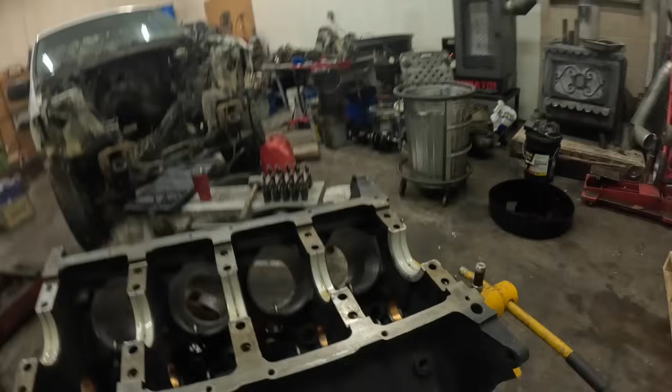Hey guys, this is a project that's been sitting at my shop; this guy's been waiting for a long time for me to get this done. Anyway, finally got it back from the machine shop. Machine shop's had it for probably a good 2 to 3 months, I'm thinking somewhere in that range. Anyway, this is a 7.3 Powerstroke. One of the YouTube viewers brought this thing down from the Portland area quite a while back, and we're getting it back together.

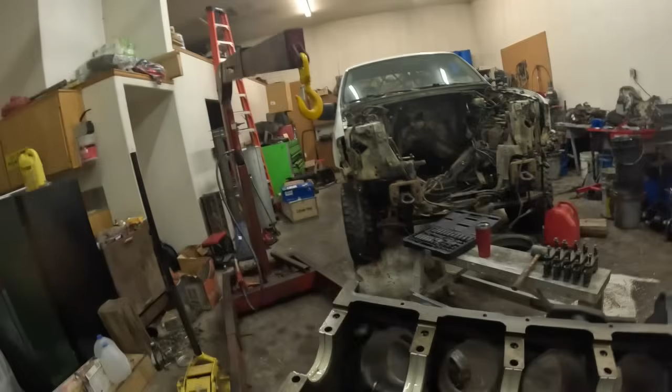But anyways, what was going on here, he bought this pickup from a logger or something, and they basically dusted the engine. It had a lot of blow-by on it, and you could tell when you started cranking on this thing how freely it spun over. Usually when they spin really fast, they either got really good batteries in them or they got low compression. And this one had low compression. You could pull the fill cap off of it and it was just a steam cloud coming out the fill cap. But anyways, no rod and main bearing failures, no cam failures, so it's all going back to standard bearings.

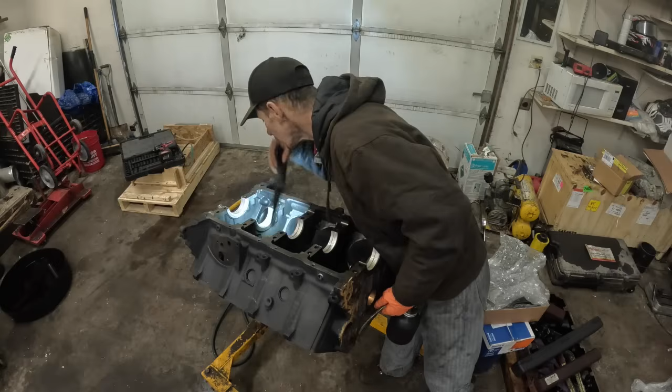That's why I'm not Plastigauging anything, because it didn't have any problems with any of that stuff. The machine shop put the cam bearings in it. So as I'm talking right now, I'm physically checking to make sure they lined all the oil holes up on the cam bearings. And so I'm not going to Plastigauge any of the mains because there's really no need to do that. All the bearings are standard. I didn't have a crank reground. I didn't have anything done to the cam. So they should be fine.

You just got to verify your bearing numbers. I even took an outside mic and measured the thicknesses on my old bearings in comparison to the new ones, and they're almost exactly the same. So that kind of will eliminate that. You can measure your bearing journals too, so that'll tell you a little bit too. So anyways, I'll continue on here with the regular video.

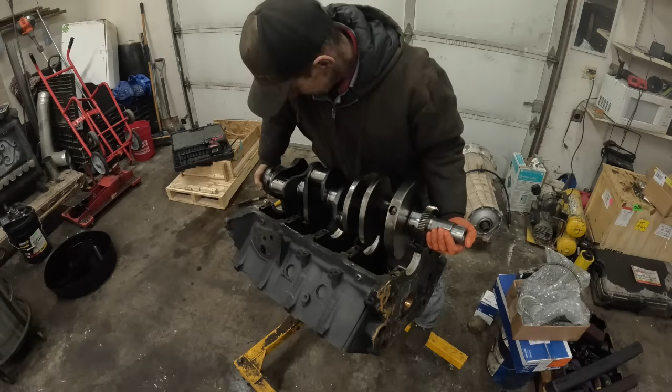Okay. Go. Okay, now we'll get our bearing caps over here on the bench. Get them all set up.

I broke my Leatherman I had for years. I was twisting on something the other day, and the damn jaws right there where it pivots just snapped right off. Really kind of surprised that happened. Them Leathermans are usually pretty damn tough and almost indestructible, but my wife says I could screw anything up. Oh my gosh, getting some of this stuff unpacked is just irritating sometimes.

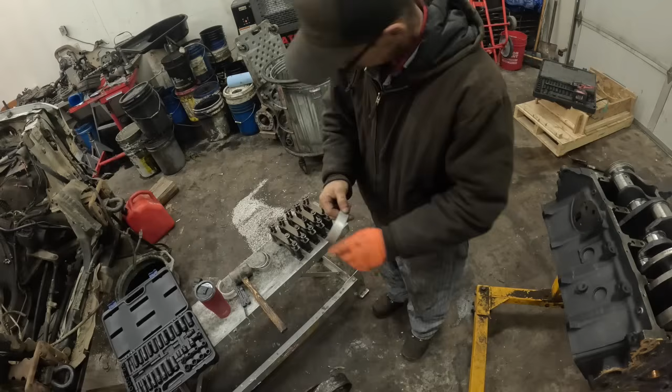Let me get my glasses, because I like to read the back of the bearing if they're marked. Make sure they say standard on them so we don't get in trouble. Now, if you're a novice at this, when you're doing your bearings, just common sense. The ones where your main oil rifle comes in are going to have a hole in them, and those are going to be your upper bearings. Your lowers in the bearing cap aren't going to have oil feed holes in them.

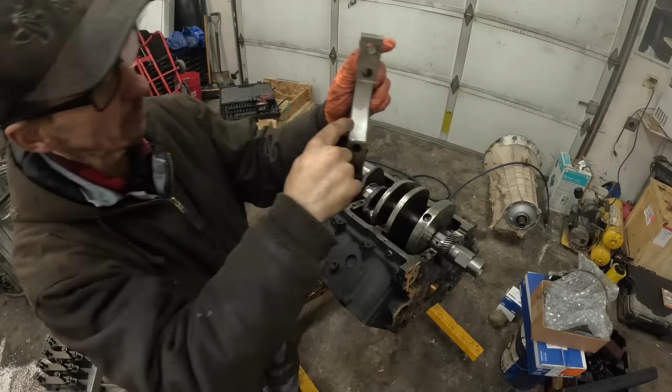Okay, this is going to be the end one here. I thought they were numbered. Oh, that says number 1 on it. Okay, that's number 1, and the arrow is pointing that way. That's the front of the engine block. And another way you can tell is your bearing tangs will be on the same side of the engine.

It does not hurt to prelube the threads on your bolts. What I like to do is put a little bit of oil right here on the cap. That way when that shoulder grabs it, it doesn't bind up, most of the time anyway. I even put a little bit of oil on the shoulders themselves. Just go nice and easy.

But these 7.3s, you can sit there and tweak it. You can't hardly bend them. It's a way heavier duty engine. To me, this is a way better engine than that 6.7. Yeah, them 6.7s got a lot of power and all that. I just look at the way this engine or a 24 valve Cummins is assembled, and I think these are way better engines than the new ones. I pretty much don't like most of the new stuff that's out. I think it kind of fits right in with the rest of America. I don't really like it.

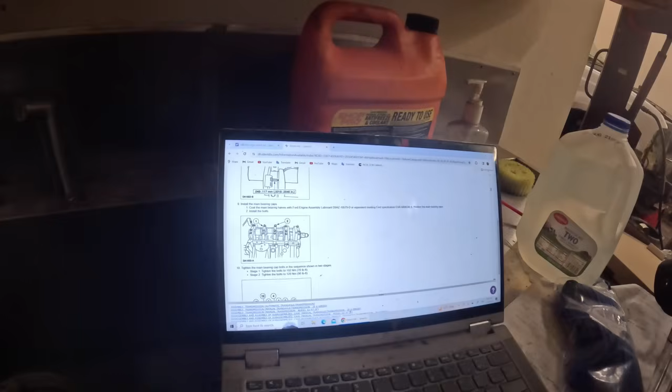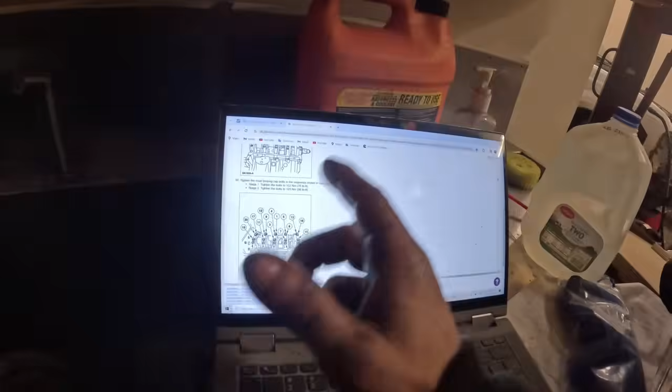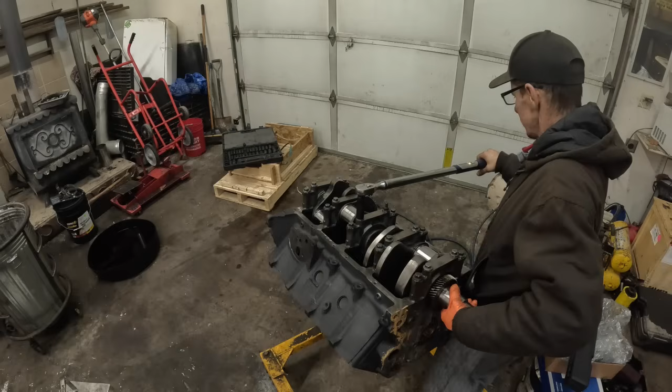Do not turn the crankshaft while performing the main bearing. I'm not doing that. Alright, starting one, 76 foot-pounds. 96 foot-pounds, okay. So they're starting on the outside bolts. 1, 2 on the outside, 3, 4. I know what they're doing. They're 76 for the first stage, 96 for the second stage. A wise thing to do is make sure after you torque it that it still turns freely and doesn't bind up.

My wife got me this torque wrench for Christmas. It's a Harbor Freight, a Quinn one, but I read the reviews on them. I told her I wanted one because I didn't hear anything bad about them. And I'm going to be completely honest with you. I bought that Snap-on one, and it's been nothing but a problem. The batteries, you're always having to stretch the spring out in it to make it work. Nothing but problems ever since I've had that thing. I think this is actually a higher quality tool, to be honest.

There's Snap-on stuff that's good, but some of their stuff is really overpriced shit, you know. It's just like buying a John Deere. They're living off their name. I know I'm ranting and raving, but it is what it is.

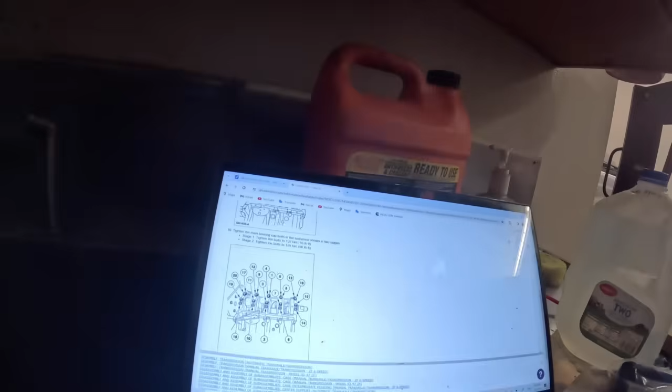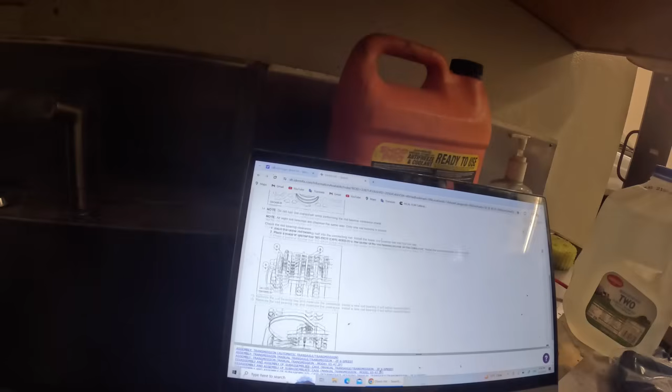Okay, so we've torqued our main bearings down. We're not gonna mess around worrying about that. Okay, the intermediate compression rings. Now they're talking about rings already. Usually you put your cam in, but apparently we're not doing that. Okay, let's see here.

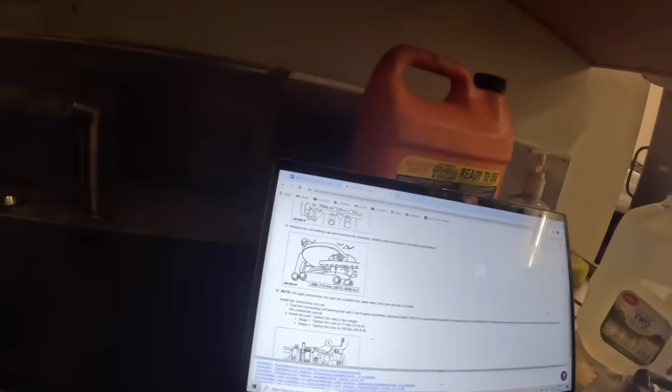Well, let's see here. Okay, so it looks to me like they want you to put your pistons and rods in. All 8 piston and connecting rods are installed into the cylinder block the same way. Only one piston and connecting rod is shown. Okay, square, intermediate compression ring, keystone ring, and of course your oil control ring.

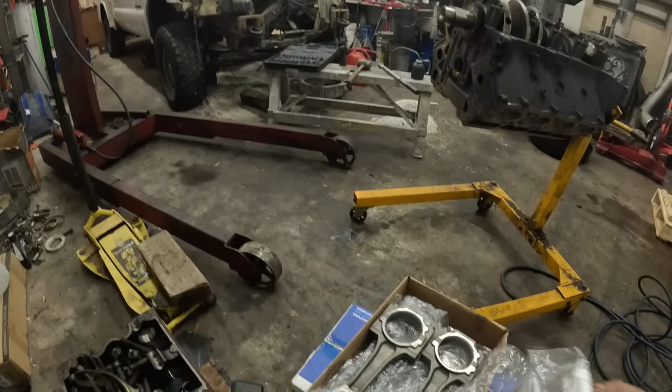So I had all the rods redone. They did all the small ends on the rods. Here they are right here. I guess I must have left a glow plug or something in the cylinder head. There's the dowels that came out of the head, or the block, or whatever. So here's all our rods. They've all been redone. So I'm gonna start setting these all up.

Well, folks, this is a continuation of the 7.3, but circumstances have changed quite substantially since the last time I was working on it. I have a broken foot. And here's what happened, guys. We'll elaborate on that a little further.

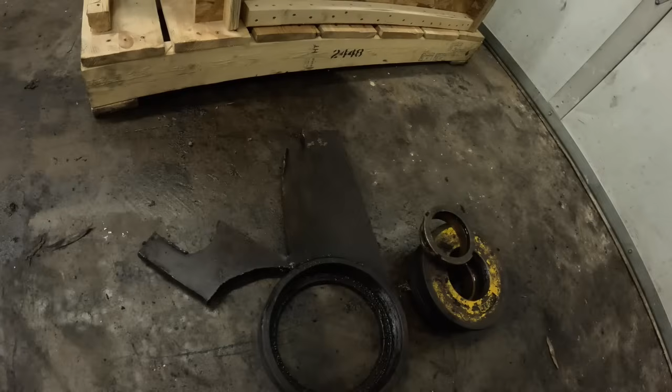So I had a pretty good sized cylinder out there. You can see the size of the nut. It's just a round gland nut. I had a big chain wrench, and I actually broke that chain wrench trying to get this off. I had it heated. I could not get it. It was just rusted solid to the threads. And then I had trouble with the barrel turning on me while I was trying to do it.

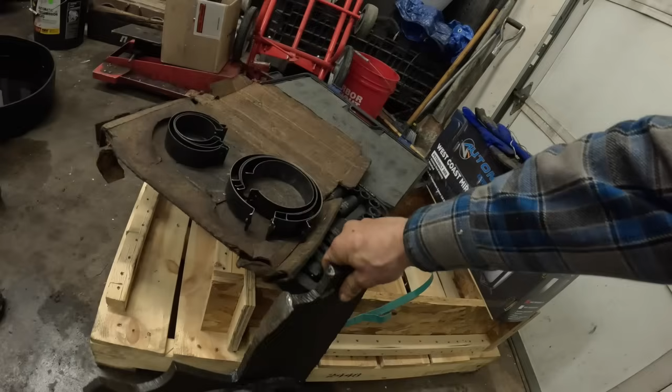Anyway, I finally wound up putting the stabilizer cylinder of my crane, which jacks my truck up off the ground, on top of the barrel and put the whole weight of the truck on the barrel trying to get the stupid thing loose. And I welded this. You can see where I hit it with a 12-pound sledgehammer. So here's what happened. You can see the plate that I welded on there, which I'll gouge back off with my gouging rod and clean up, and you'll never know what happened.

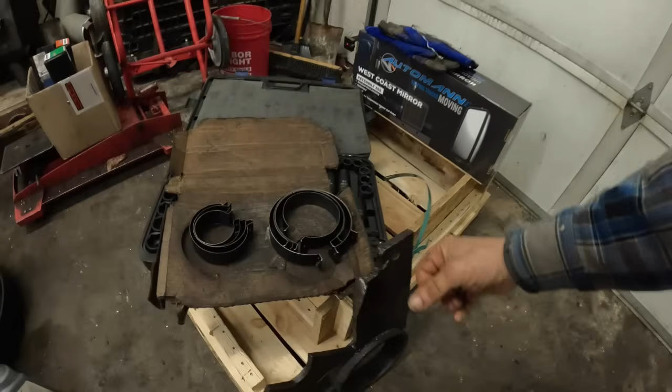I had wrapped a strap around that big cylinder and pulled it over. I was trying to reposition it because I had actually got the thing loose and spun around, and I was trying to get it under the leg of that cylinder on my truck, to put down pressure on it again and whack it again with the hammer. I pulled it towards me like this, and this plate rocked over, and the entire weight of that cylinder and the plate landed on top of

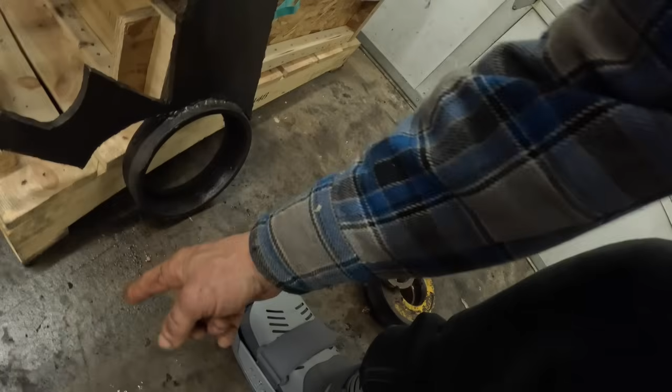my foot right here. We went and got the x-ray this morning, and it split the bone right where the joint is, where the next toe towards your big toe meets. It cracked that bone right in line, which there ain't a whole lot they can do for, but they gave me this boot and said to try to take it easy, which probably isn't going to happen. So anyway, Lulu, are you already trying to get out the dog door?

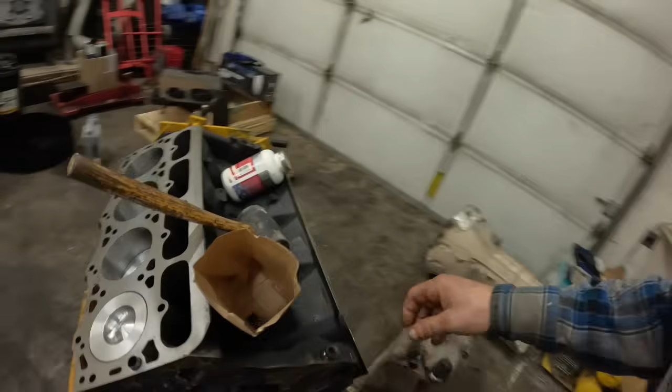So here's where we're at on this thing. We'll continue on. I'm trying to find my light here. Got a couple puppies here. Need to get this transmission loaded up and get it back for a core. I've been sitting on my butt for 3 days, and my foot feels a lot better. But anyway, enough crying about that.

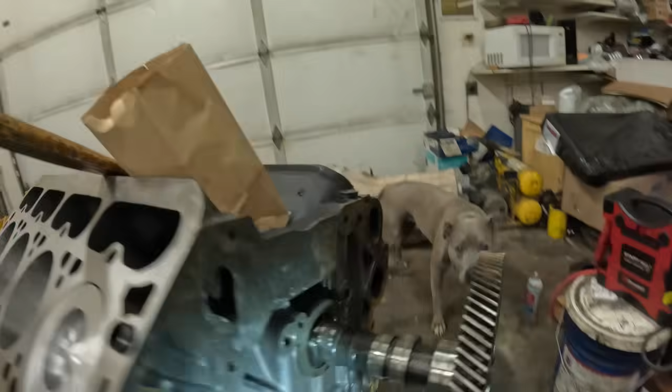Let's continue on. So I got my timing mark for my crankshaft pointing straight up. I was putting this cam in, guys, and then I noticed the typical machine shop situation: they pulled all the gallery plugs out and didn't even send them back. Most of the time they'll send them back to you in a Ziploc bag, and you're supposed to figure out where all that shit goes. So I went to the hardware store and grabbed a couple pipe plugs.

Lulu, what are you doing, girly? My little wiener dog's in here with me. So we're gonna work from the shop at home today.

Man, this stuff's been sitting a while in their store because it's all separated, and I might have to get a screwdriver and mix it up. All the PTFE is separated from the paste, and that's not good. Dripping it right on the brush they gave me. That's making a mess.

Get these pipe plugs in the main gallery bores here. I'll have to go find an Allen wrench to tighten these up. Let me go over here and find an Allen wrench that fits that. Which I don't even know if I got an Allen set in this.

I keep buying more and more tools, and you know, like here's more tools. Here's that special tool for that trailer I did that will probably sit there and collect dust now, but it is what it is. I got the job done. Hopefully it's done correctly. I do have Allens, never mind, I forgot. I did buy a bunch of Allens that one day.

Let's see, what do we got here? It should be an SAE situation here. Okay, let's go over here. Trying to remember what I did with all the ratchets. It's a 1/2-inch drive, kind of overkill for what we're trying to do here, but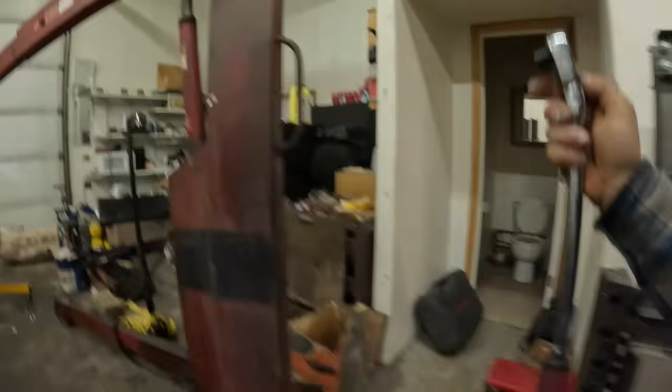I better take my little wiener dog in. She's already cold. She's just a little bitty thing, so it doesn't take much for her to get cold. There goes the light.

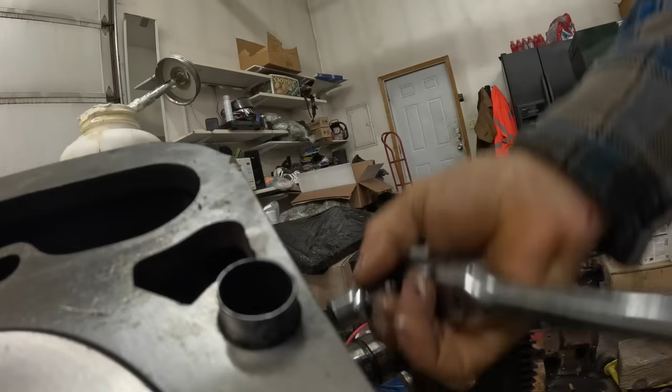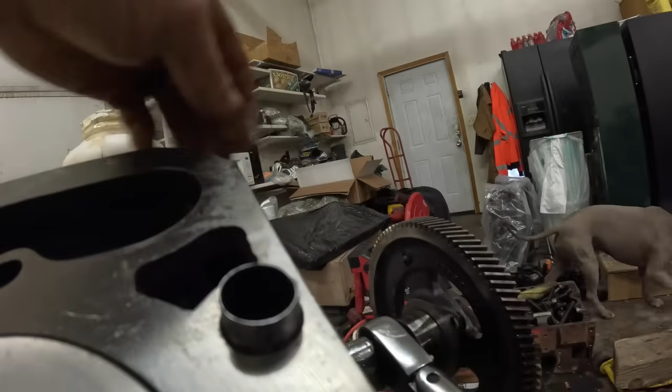I need these to go flush if I can, because the thrust plate's going to hit them if I don't. Man, I hope we don't run into problems here. It's not really wanting to go flush. I'm not really liking that very much. Well, let's check this out real quick. That's why I kind of wanted the plugs that came out of it, you know. Why is that not going on in?

Okay. There we go. Now, is that going to interfere with anything? If I go like that, let's see here. The thrust plate goes over here like that. Okay, those Allen plugs should not interfere with anything as far as I can tell. No, we should be all right. Okay, let's pull it back out.

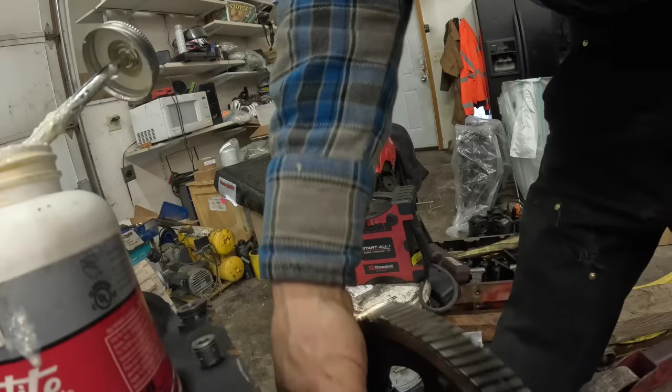Now that we know that those Allen plugs are not going to interfere with the thrust plate of the cam, which those shitheads would have thrown the ones that come out of it in a bag or something and sent them back with it. But I guess all I can really say is that I'm not surprised. I'm kind of used to that being the situation.

One of these 7.3s I had at the machine shop one time was kind of the same situation. They had went through the whole thing and same thing, they didn't put them back and I wasn't paying attention and it was my fault too. Now I know. I thoroughly check all these galleries now that I know that they're gonna pull all this stuff out and not put them back. So

anyway, on that particular engine, these are a HEUI'd engine. If you don't know what HEUI stands for, that's a hydraulic electronic unit injector. Basically, the injectors are controlled from engine oil pressure off your high pressure oil pump. There's an amplifier piston on the actual injector that amplifies the pressure. So you're going to have oil pressure on top of the injector, and it's putting a higher pressure out the bottom where the fuel side is. Okay, so let's figure out the timing mark.

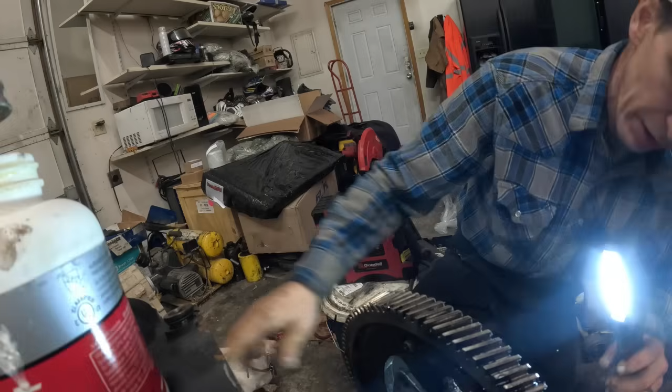Anyway, if you have no oil pressure off the low pressure oil system, i.e. cranks, main bearings, things like that, then you're not going to have high pressure oil as well. Okay, there's a timing mark there. Just making sure. Where did it go? I've lost it. Gotta get this thing a little bit closer here. There we go. Gotta find my timing mark again. Somewhere in that vicinity, right there.

Gotta get this last journal to line up here. That's being a little bit stubborn.

Okay guys, I torqued one head and went in the house and put my foot up for a while, just trying to not overdo it and end up making things worse. So came back out here after a little bit of rest and I'm gonna go after her again. Got the one head torqued. I know you're probably wondering. I don't trust this cheap lifting stand that I bought. It's got a 1,250 pound capacity, but look, it's already bent in these ears. So if I'm not here, I put the strap on it and just take some of the load off this end of the engine.

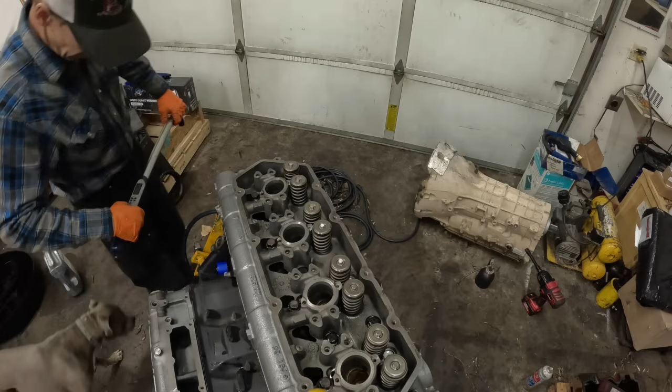Let me hobble over here and get the torque wrench. Okay, so the first step is 65 foot-pounds, second step is 85, and third step is 95. And let's go over here to 65.

And you start in the middle and work your way out. It's pretty straightforward on these, and it's the same thing I do on all the rest of them, guys. I like to get my threads wet, and then I like to put a little bit of oil in the shoulder of the bolt, and I put a little bit of oil with a squirt gun right on the surface that the head of the bolt's going to grab. That way they don't bite too bad, and sometimes they still do even after you do that. So

I'll tell you what made this thing feel a lot better. Actually, they gave me this special boot to put over my foot, and it's got a little manually operated hand pump on it, and I aired that up because I was talking to my buddy Dave down there. You guys that have been watching this channel forever probably remember that really nice 389 Peterbilt that I did the ISX Cummins overhaul in years ago. That was Dave, and he's a really good friend of mine.

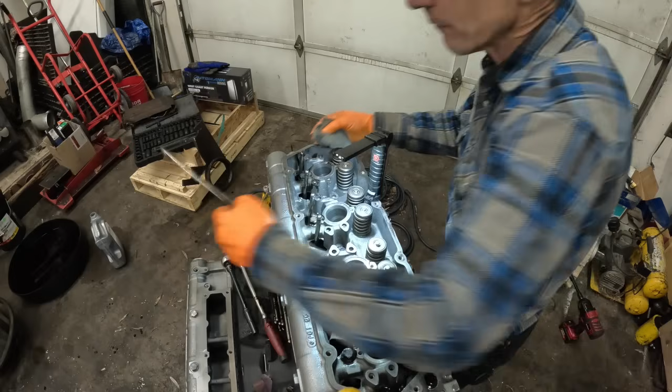These are pretty easy here because the way the head gasket's made kind of has its own little hole in it, so it's kind of hard to miss the cam follower on it.

I was sitting down for 3 days. I was watching an old guy there, his name's Wayne. His channel's name is Old Two-Stroker. I would encourage you to check out Wayne there at Old Two-Stroker. He takes a lot of old trucks, you know, that have Detroits in them. And he had one there, an old 359 Pete that had a 3408 Cat in it, and he got it running. And that was quite an ordeal, getting that one running. But anyhow, he worked on a lot of them old trucks like that, and gets them going.

Another channel that I started watching quite a bit of, and I don't know what the guy's name is, I don't know if I ever caught his name on his videos, but it's On Fire Welding. He's out of Fresno, and he seems like a pretty good dude. Got some really nice equipment, man. He's got a nice service truck and nice welder and plasma cutters. Just a lot of nice stuff. And he works on some pretty nice equipment too. And he gets some of the kind of equipment I get too, some real junkers that he has to work on. But he's good to watch.

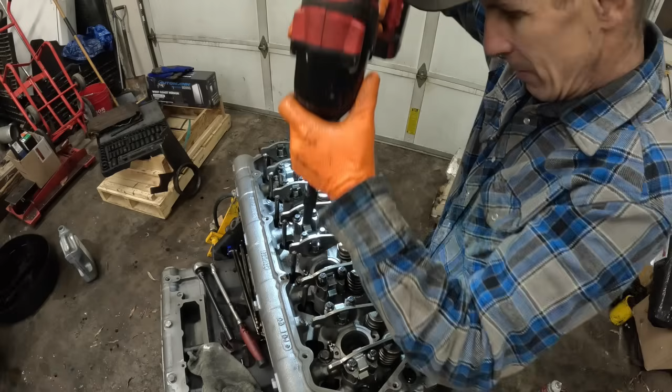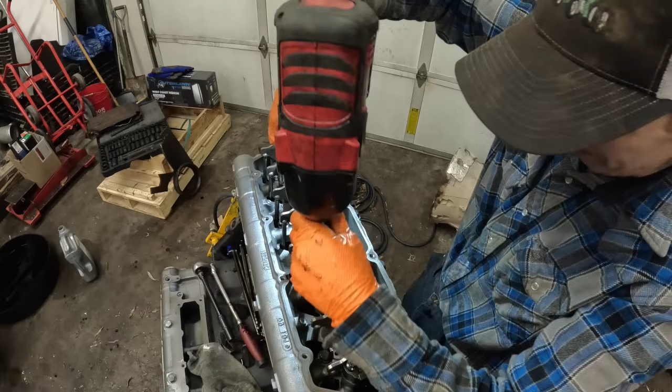Gotta look up and see what the torque is on these. I don't remember off the top of my head. These have hydraulic lifters, so you don't have to set valve lash or anything like that. What's happening here? Back that one back off. There it goes.

Yeah, I think if I can get that guy to pay for that retrofit that I did on that Peterbilt, I think I'm going to buy a, not the big high dollar line bore like that guy at On Fire Welding, that Climax, man, that's expensive. He's got the hydraulic power unit that runs it and everything. I mean, that's an expensive setup. I'm going to start out cheap and start doing some of these farmer stuff and get the hang of it, you know, and I'm going to start doing some of that line boring. And the reason I want to do some of this kind of stuff is I'm looking for stuff where I can make it easier on my body. I'm getting tired of some of this heavy, hard stuff that I've been doing. I'm getting tired of it, you know.

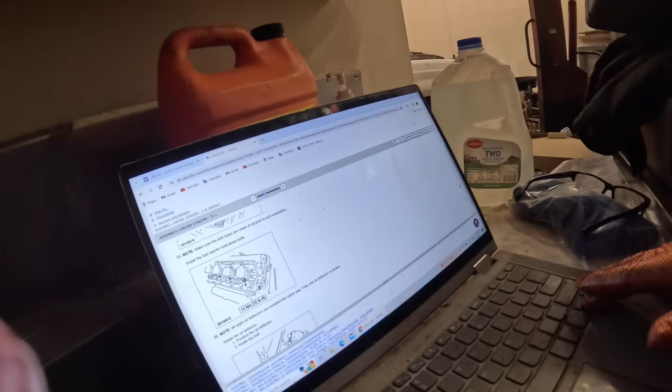Head's torqued. Let's see, I'm looking for rockers. Let's see, what are they saying there? Install the glow plugs, 14 foot-pounds. Okay, I guess I should have put the injector in first, but I didn't. They're torqued down to 10 foot-pounds. Okay, the rockers are 20 foot-pounds. So we'll go over these guys and torque all these rockers down to 20 foot-pounds. And then I've got to get every injector.

The only thing you really need to pay attention to on these injectors, on these 7.3s, is the number 8 is going to be a long lead injector. You'll always notice number 8 will have the electrical connector on it blue. And you'll read the top of the coil and it'll say LL for long lead. That goes in number 8 cylinder. Don't forget that. The rest of them are all the same. Okay, guys. Just kind of show you what we got going on. We got the one side together.

I am looking for, losing my mind here. Had a guy call me from Oklahoma. He called me a while back about a truck with an X15, and on that X15, I guess it was derating, and I can't remember the entire story. I get so many of these phone calls that

Hang on, I kind of need to pay attention here. I don't suck them down tight with the impact, I just snug them up. I just like to feel if anything's binding, because you got hydraulic lifters and, trying to remember.

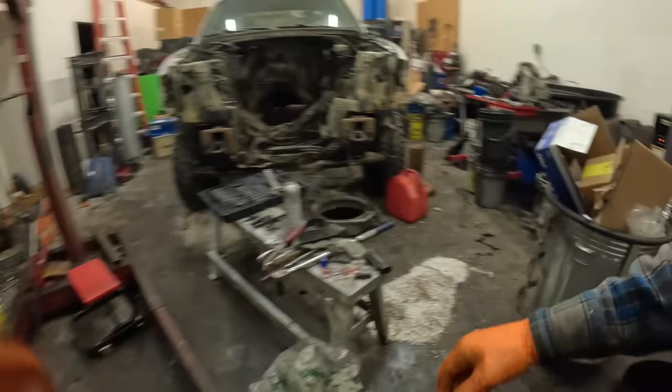No way. Okay, so let's go over here and I'll show you firsthand. Let's set that injector down right there. You'll notice here's the 2 different bolts that'll go in your injector. One's got this longer shoulder on it like that right there, and one doesn't. So the one that doesn't have that really long shoulder, put it on the side that your glow plug and everything plugs into.

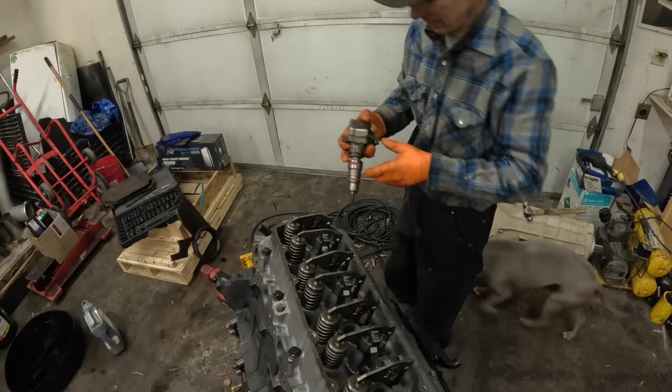And what you do, I'll show you. I don't pull the spill spouts off these, I leave them on there. But rock that forward that way, it'll kind of go over that bolt. And you can whack it with your hand, and I don't get a regular hammer and start beating on this. This is not even a hard rubber mallet. This is a soft one. I get a soft rubber mallet. This is actually a real rubber mallet.

And I just tap it like that, and then, see, you can cam this hole down over, just like that, and then put it in there. But torque that first bolt down to 10 foot-pounds, and then take your other bolt, get it started in there. Let's go ahead and get this one torqued down. And this one gets torqued down to 10 foot-pounds, 120 inch-pounds.

All I'm trying to say is don't get a regular hammer out and start wailing on the top of that injector. Okay. Now that one's torqued down. All right. And that's all there is to it.